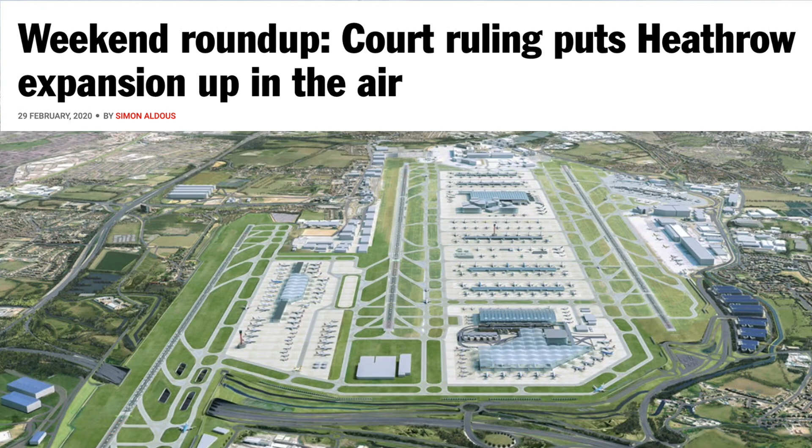I wanted to just set the scene a bit for resourceful material. We're in the world now where these sorts of planning applications can get refused. And also I just think the rhetoric for Futurebuild this year is exactly where we need to be. And I might draw your attention to one of the action groups that's been set up by architects in response to the climate and ecological emergency. So we got ACAN, who have got a stand over there, and you can go and take part in their carbon confessions.

We find ourselves in an environment where 75% of the population of the UK live in regions that have declared a climate and ecological emergency. Not only that, the local authority councils have said they want to be net carbon zero by 2030, which is of course pretty much impossible, but the ambition's to be applauded.

So why us in the construction industry? It's because we consume so much. 60% of the UK's waste is created by the construction industry. That's 120 million tonnes of waste a year. We consume 600 million tonnes of products annually.

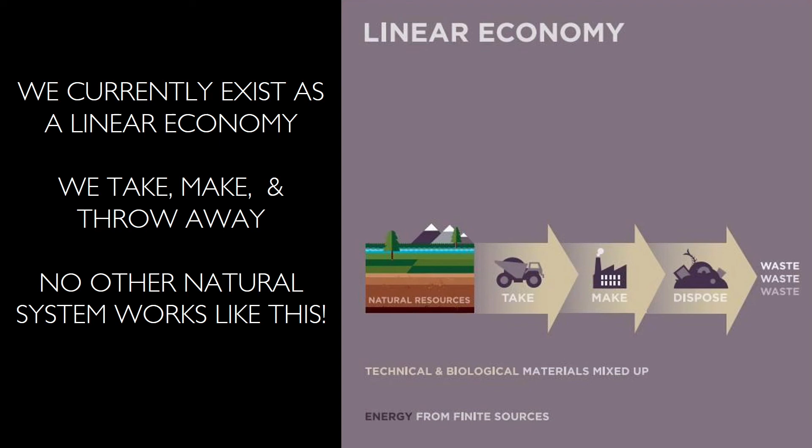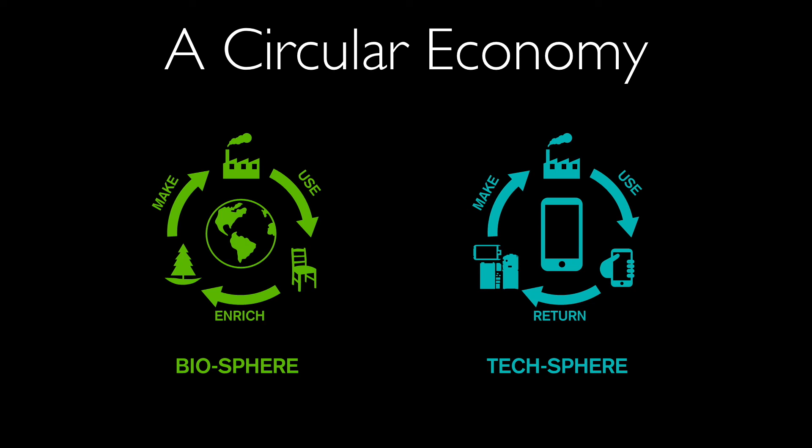But we have opportunities, and I think the circular economy and closed-loop systems and sustainability on the whole provides us with that. I wrote a book about it, which has got 30 case studies of projects dealing with recycling, reuse, reduce, and the holy grail of proper closed-loop systems. The construction industry's halved the amount of waste over the last 10 years that it sends to landfill and incineration, and WRAP estimates that nearly 20% of the construction industry is already circular.

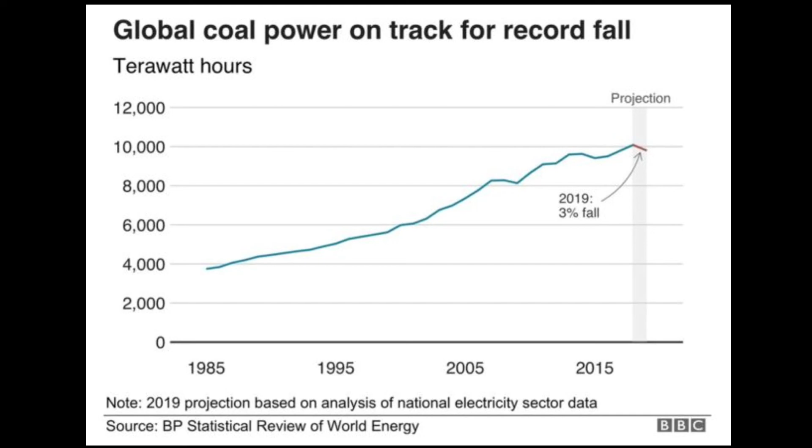And this is perhaps the best slide so far. We are reducing the amount of coal we're burning. And it's our cities that give us hope, I think, because I believe it will be these city-states that set the standard. They are at the moment with their net zero targets of 2030. That's within the context of building regulations that are nowhere near asking for any of that, and that's why there's been a big debate about Part L at the moment.

If you want to go on the ASBP website, you can see some resources that we've produced on natural fibres, information sheets, presentations, etc., and that's a growing body of work. So if you go on the ASBP website, you'll be able to learn a bit more.

So if we look at the natural fibre itself, you can see that it does many things. It's a heat buffer. It's an efficient insulator. It acts as a carbon store. It's a pollutant filter. It's a sound absorber. And that helps make it ideal for insulation. Because, of course, when we think of insulation, we just think of heat loss. But, of course, insulation does much more than that.

Insulation can amount to at least 50% of the volume of the building fabric. It has benefits in terms of every aspect that I've highlighted there, really. So when we think of insulation, we've got to see it as a multifunctional component of the building fabric. And I'm just going to run through the aspects of insulation and what makes natural fibres particularly good when it comes to each aspect of that.

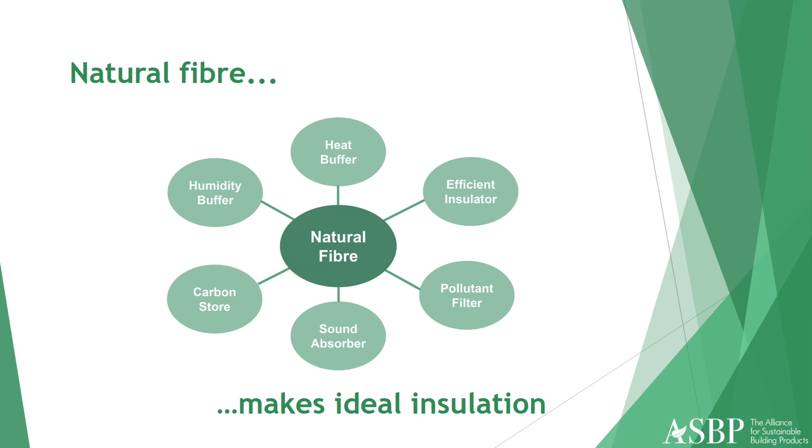So I've put at the top there a heat buffer. So if we then look at a heat buffer, what do we mean? Well, what we're trying to do is to make sure that the peak heat outside a building and the peak heat inside the building are shifted out of phase with each other, because the last thing we want is the inside of the building to be as hot as the outside of the building in the middle of the day. And in order to do that, we have to shift those peaks out of phase with each other.

And the best way to do that is to use a material that's got relatively high thermal mass, relatively high specific heat capacity, and low thermal conductivity, all of which you're going to get from a natural fibre. So what that means in practice is that as we have a high external temperature, the insulation itself is absorbing heat and it's pushing the peak temperature away.

In fact, what we're trying to do in a 24-hour cycle is move the peak external heat and the peak internal heat as far away from each other as possible, which is a 12-hour shift in the phase. And we can achieve that with a natural fibre insulation. You can see with a mineral-based product, you're only shifting that phase by about 6 hours, so it's not enough, really.

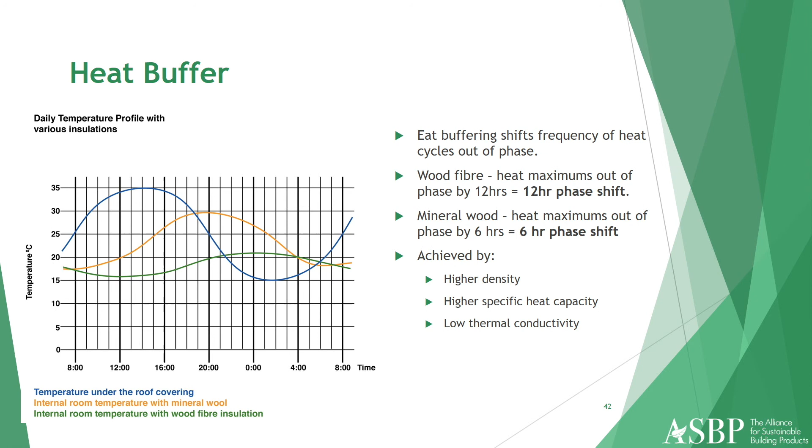We then look at natural fibres as a moisture buffer. It's all right. There's a lot of materials would describe themselves as breathable, and I suppose I can understand why, because it's a very intuitively positive thing to be breathable.

But natural fibre insulation is breathable in a true sense, in that the fibres themselves aren't just vapour open, but they absorb and release moisture and hold that moisture in a physically bound form that makes the moisture much less active and much less prone to doing damage. And then they can release the moisture again.

So moisture is held by natural fibre in three ways. One, very tightly, which is sort of permanently in the fibre. And then some water is held very loosely, and it's sort of absorbed a little bit and released a little bit. But you've got this sort of Goldilocks zone in the middle where the water can be easily absorbed, held safely and easily released, and that's where the real breathable benefit of a natural fibre comes in.

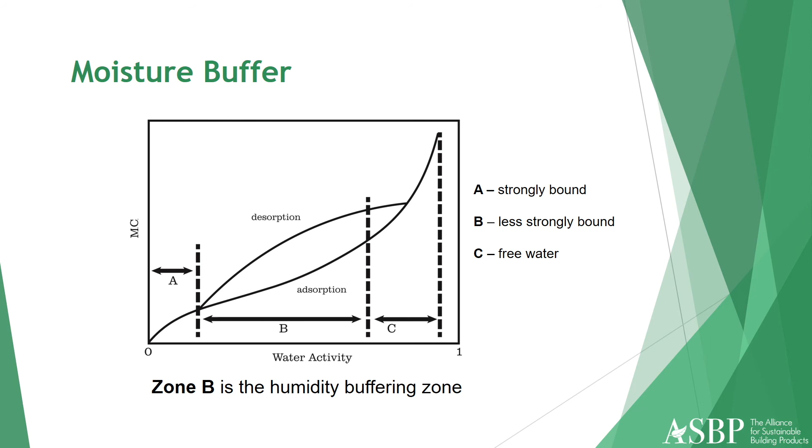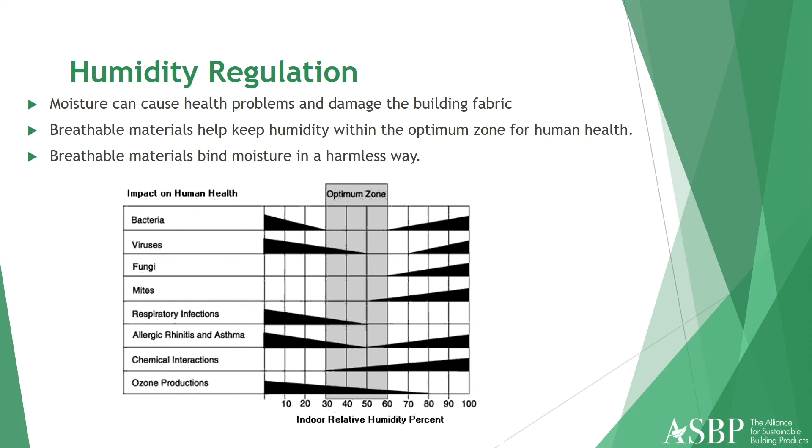The main benefit of breathability is to help maintain humidity within a safe level within the building, and I'm sure many people are familiar with this diagram, but it's very important to keep relative humidity within that optimal zone, because it inhibits a lot of negative impacts from bacteria, microbes, degradation within the building fabric, etc.

What happens is the natural fibers themselves will constantly adjust their moisture content to be in balance with the surrounding humidity, and adjust surrounding humidity to be in balance with theirs. And that's really important when it comes to insulation, because heat and humidity are very closely linked. As I mentioned earlier, the water molecules bind to the proteins or the carbohydrates in the natural fibers like magnets, and it holds the water in a very safe form.

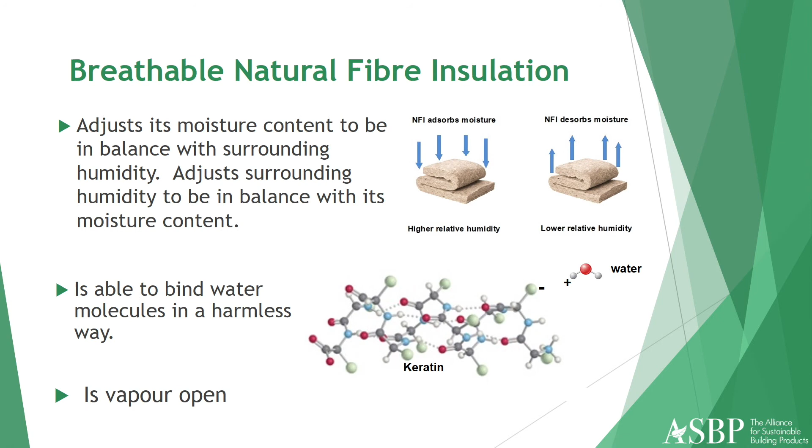Source control in emissions, VOC emissions from building materials, is becoming an increasingly important issue, and rightly so. I've got some examples here of thermally bonded sheep's wool, thermally bonded flexible wood fibre, and wood fibre boards, looking at total VOCs, carcinogenic, mutagenic and reprotoxic substances, and formaldehyde as well. And you can see for all three of those products, the levels of emissions are extremely low.

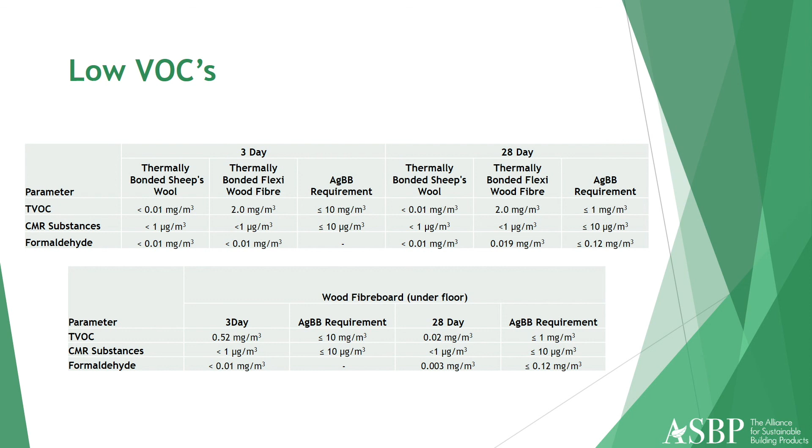If you look at sheep's wool in particular, sheep's wool can actually chemically neutralize formaldehyde. Formaldehyde is a problem I think a lot of people felt was dealt with in the 90s or the early noughties, but indoor formaldehyde levels are still a big issue. Formaldehyde off-gases from an awful lot of products within the built environment. So having a material that can permanently lock up and remove formaldehyde is a very useful property for anything.

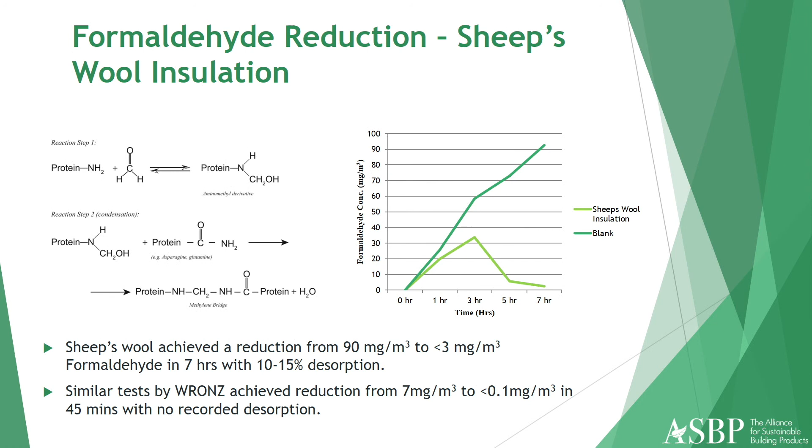I've sort of steered away from some of the eco stuff here, because I wanted to make the point that these are very functional products, that the natural fibers themselves provide the insulation with properties that are over and above some of the better known, more conventional products. And if we're going to shift to an economy or an environment where we're making use of more natural resources, we can't be pigeonholing these as merely an eco alternative. They're not just an eco alternative, they're functionally superior in many end uses.

I'm not saying in all end uses, because we have to realize that certain materials are appropriate for certain end uses, but certainly in terms of the use in construction, natural fibers, possibly other than structural timber, are currently underutilized. But as I said at the start, these products are being made at scale and are scalable, so there's no reason why we shouldn't, over the next decade, have a significant shift to the use of more natural fibers in end uses such as insulation.

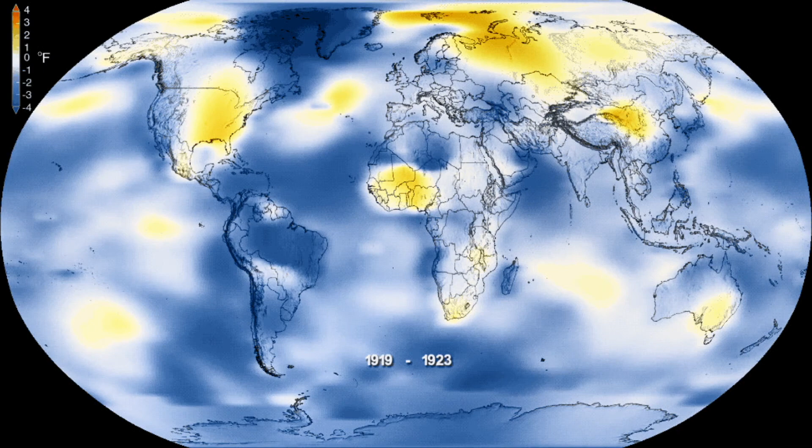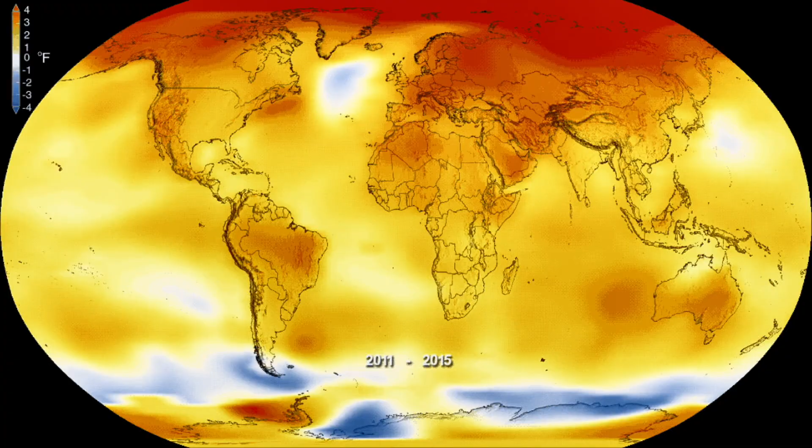And according to NASA, last year was the hottest year on record, with the Earth's surface temperatures rising by 1.1 degrees. And we're on a trajectory to raise this number to 5 degrees by the end of the century. The planet's long-term warming trend has caused wildfires to rage through the planet and freak storms to destroy and displace our communities. We share the Earth with around 15 million extraordinary species of animals, plants, and microorganisms.

And all this magnificent biodiversity is being lost due to land use, unsustainable use of natural resources, climate crisis, and pollution. And today, about 23% of mammals and 12% of birds are considered threatened, of which many are becoming extinct. Humanity is facing a mammoth but self-inflicted problem. And at Biome, we share the belief that there is a solution, and it has a name: biomimetics.

Biomimetics is design inspired by the way functional challenges have been solved in biology. And one of the fine examples of applied biomimetics is the Gherkin building. Its structure was configured by the very intricate but robust form of the Venus flower basket sponge. Nature has faced and resolved many challenges through centuries of evolution and has answers to engineering, design, and systemic problems.

If we look closer, we will find that in nature, the concept of waste is non-existent. All nutrients are in constant circulation, all forms are highly functional, and all organisms work with one another in symbiotic partnerships. And the principles of biomimetics have laid the foundation of what's now known as circular economy. So at the moment, we work in a very linear way. We extract, we make, we use, and we dispose.

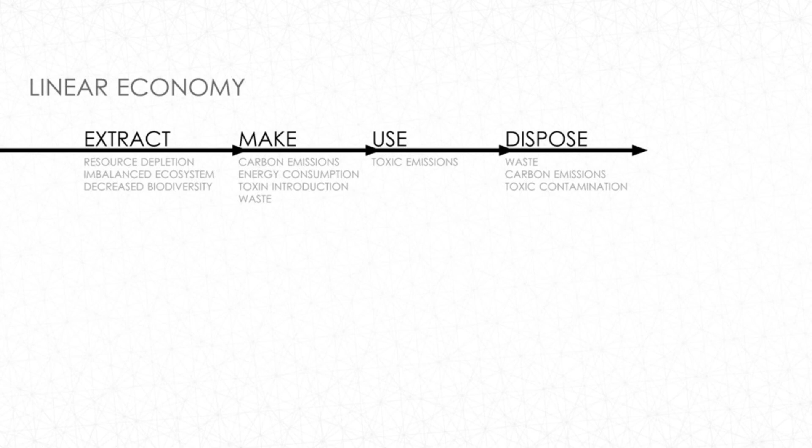However, when we shift towards the circular economy, this line will start to curve and move in infinite circles, allowing us to design out waste and keep our biological and technological nutrients in constant circulation, which will help us to have a regenerative impact on our environment, society, and economy at long last. And the principles of circular economy are at the very core of what we do at Biohm.

Biohm is a research and development-led company that allows nature to lead innovation to create a much more healthy and sustainable built environment. And we offer a collection of bio-based materials, construction systems, as well as research services to the industry. And one of the first materials I'd like you to meet today is ORB, or Organic Refuse Biocompound.

Now, at the core of ORB, or in fact all of our materials, are local waste streams. We transform food and agricultural waste into precious substrates that we then combine with our unique organic binder that, by the way, is made of edible ingredients that are available in abundance all over the world. And this compound can then be turned into highly functional construction materials with a variety of visual and mechanical qualities. ORB can be used for dry cladding, in interior architecture, as well as product and furniture design.

It's shutting down. It's shutting down. Bloody hell. Yeah, just carry on talking. I'll sort this out. I might as well keep talking.

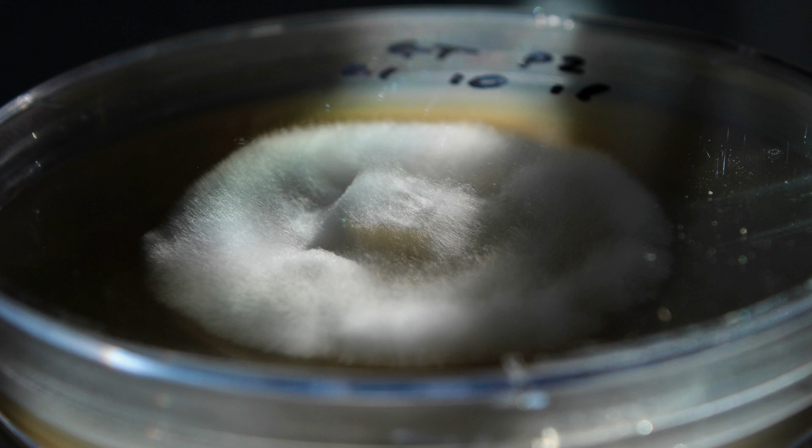Now, all of our materials will eventually combine to form our revolutionary construction system, Triagami. Triagami consists of building blocks that do not require any permanent fasteners or binders, which means that your home can shrink and grow in accordance with your needs, which will help us eventually transition towards agile communities and cities. We have been awarded for our work and recognized by many institutions.

And we are working closely with the world's largest corporations, the world's top universities, and the world's most prominent governments, and of course, with local communities, local waste streams, local businesses, globally, in an attempt to deliver on a dream of a biomimetic future, a future where industries are regenerative and work in symbiotic partnerships, where lands are nourished, where the waste is non-existent, where all nutrients are in constant circulation, where communities are prosperous, and where nature is flourishing.

Thank you. Thank you very much, Oksana. Sincere apologies for technicalities, but nonetheless a fantastically delivered presentation, so thank you. There'll no doubt be lots of questions for you at the end. As an exemplar, I mean, you say designer, but designer, materialist, scientist, all kind of rolled into one. All right, so thank you.

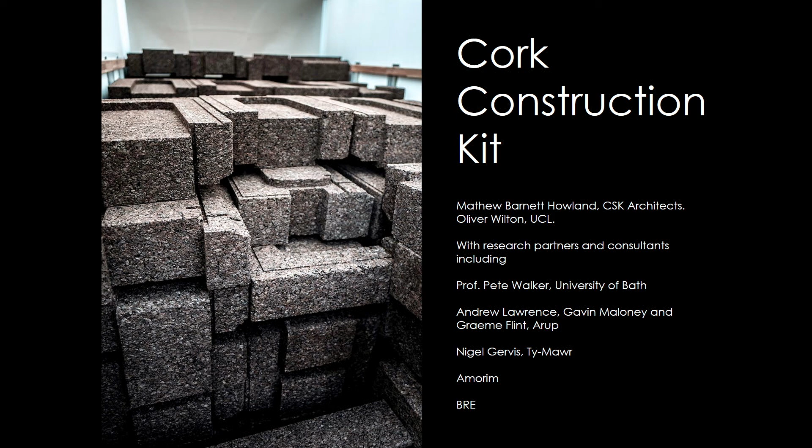Okay. So I'm going to talk about some work that I've been doing with cork over the past few years with people including Mathew Barnett Howland from CSK and research partners Professor Pete Walker from University of Bath, Andrew Lawrence, Gavin Maloney, Graeme Flint at Arup, and Nigel Gervis at Ty-Mawr. Amorim supplied the cork, BRE did a lot of the lab testing. Just see if I can move this up. Okay, it's going to be quite a rapid tour of what we've been doing over the last 5 years, really.

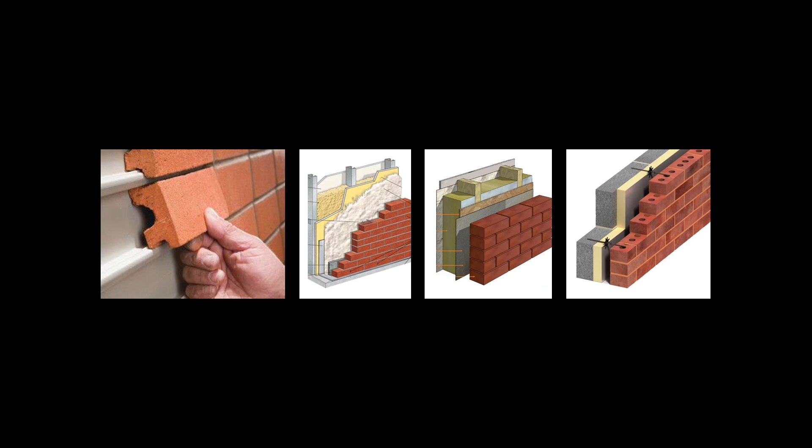So a lot of contemporary buildings deliver the sort of performance we're looking for via quite complex means. So you'll have elements that relate to structure, to thermal insulation, fire performance, internal and external finishes, that sort of thing. For example, brick buildings these days very often have got an external brick leaf. They might have a concrete block structure or a timber frame or steel structure, might have petrochemical insulation, lots of other things. And that introduces complexity over each stage of the building's life cycle. And it often ends in this, which is destructive demolition. They're too expensive to disassemble.

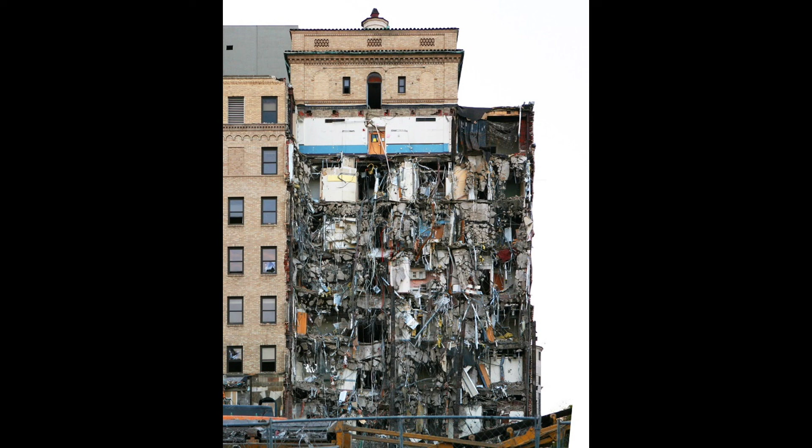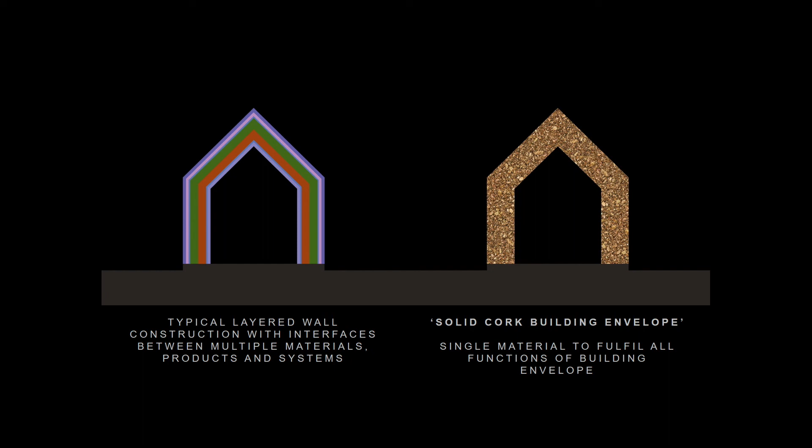So for this work, our aim was to deliver a different kind of construction system that gave us the current performance we're looking for from buildings, but did it in a much simpler way. On the right, this is our hypothesis that we could take cork and make a solid building envelope out of it that did all of these different things. And that's what I'm going to talk about now briefly.

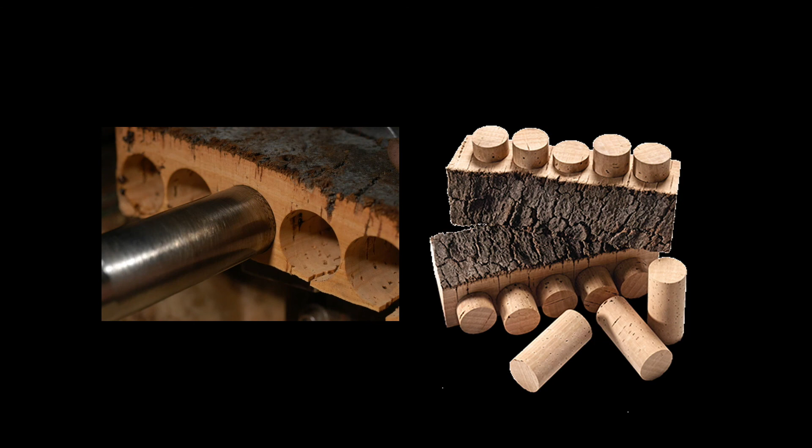So let's start off with the resource. Cork oaks have been growing around the Mediterranean basin for millennia. Cork is the bark of the cork oak, harvested about every 9 years, still using traditional methods. It's the outer bark of the tree, it's stripped without harming the tree and without causing significant disruption to the forest. These forests support significant biodiversity in the region. The prime cork is still mostly used for posh wine stoppers. You can see them extracted there on the left. And that leaves a lot of byproduct from that industry and from others.

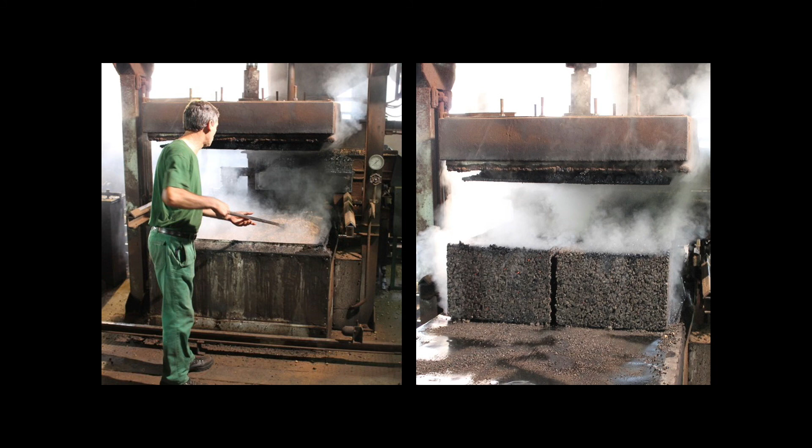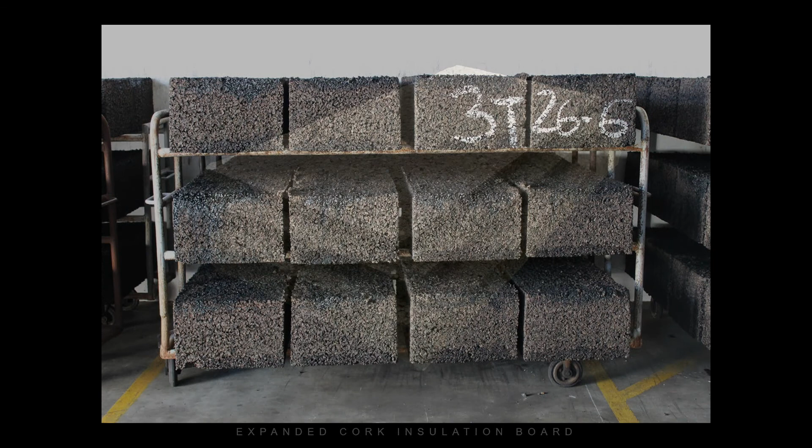The type of cork that we used for this work is expanded cork, and that's made using byproduct from other cork industries and also waste from cork oak forestry. Low-grade cork, ground up, put into an autoclave, here at Amorim in Lisbon on the left, cooked at over 300 degrees, and you get a nice freshly cooked cork billet coming out of there on the right. So it's 100% plant-based, it doesn't have any other chemical additives. These billets need to sit around and stabilize for a bit before they're typically chopped up into insulation board, which is the main use.

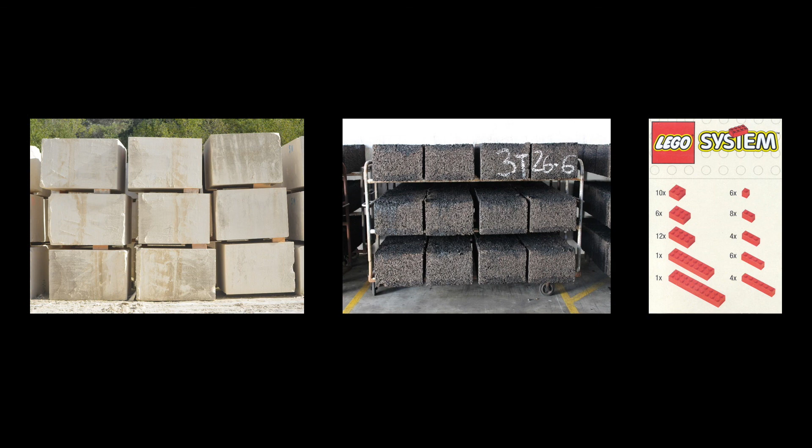Okay. So I outlined the team we worked with earlier, a mixture of academic and industry partners from across the supply chain, and we secured research funding from EPSRC and Innovate UK to proceed with this work, which ran from 2015 to 2018. So we started to think about cork as a bit like a sort of plant-based thermal insulative stone, and the aim was to develop a system that would enable us to simply assemble it, a bit like a giant toy construction kit, a bit like plant-based Lego.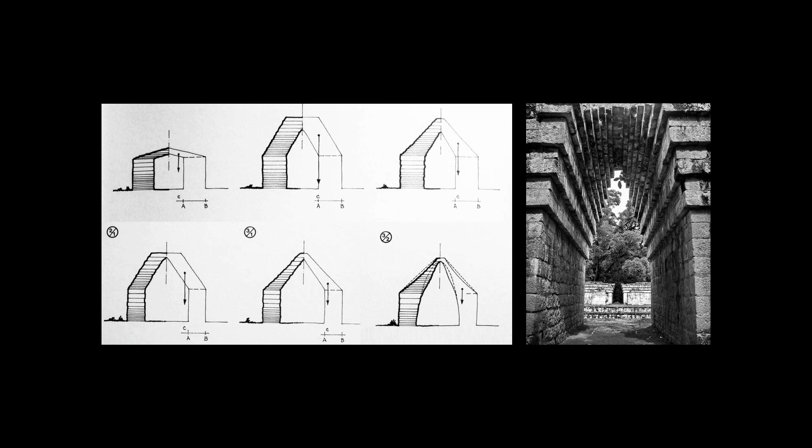So as well as this being an idea for the wall system, we wanted to extend that to a roof system. So rather than using a different form of roof construction, the roof system we developed is a corbelled system, which is basically a wall, but you just offset each block a bit, and then you end up with a roof as well. Yeah? So you'll see this, there are examples of this all over the world, dating back thousands of years, in dry stone construction.

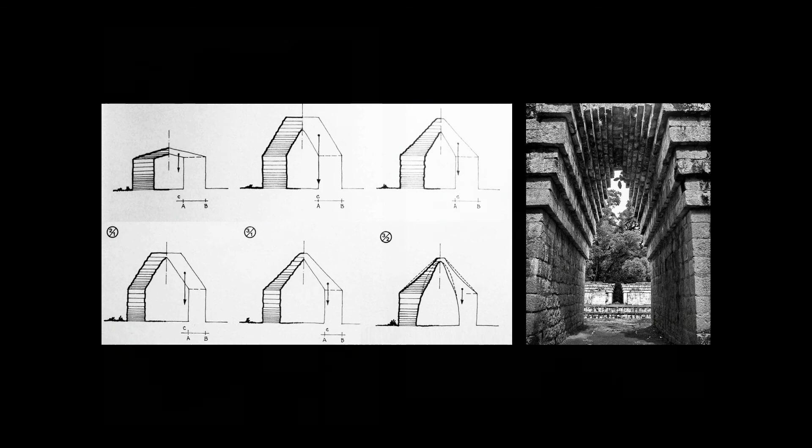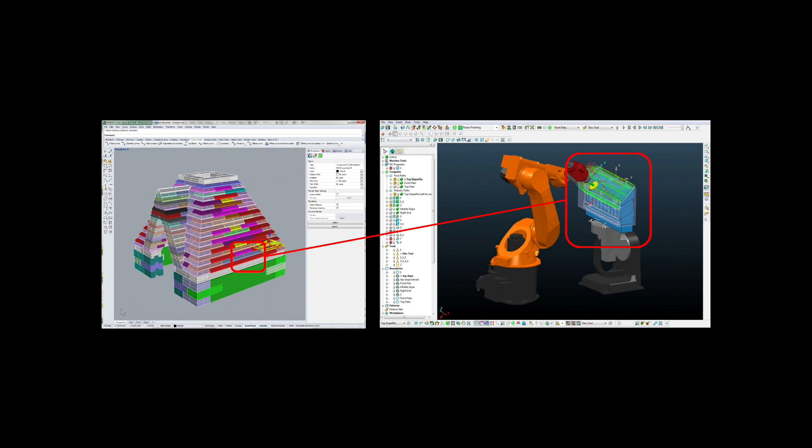So we got going at the Bartlett workshops, and things started to look reasonably promising, but you can see simple tongue and groove geometries to give a nice interlock. It's taken quite a lot of time to make these blocks, and the tolerance was quite challenging. So fortunately, we have colleagues at the Bartlett and kit at the Bartlett that enabled us to switch across to robotic milling, and we developed a tailored robotic milling method to construct these blocks more quickly. Let's see if this will work.

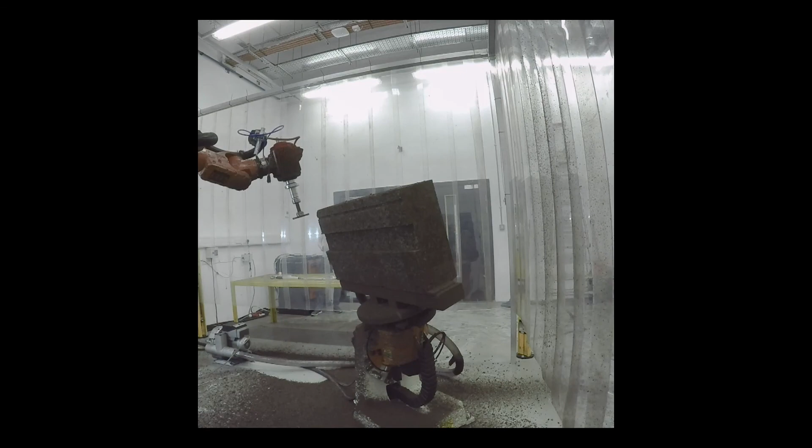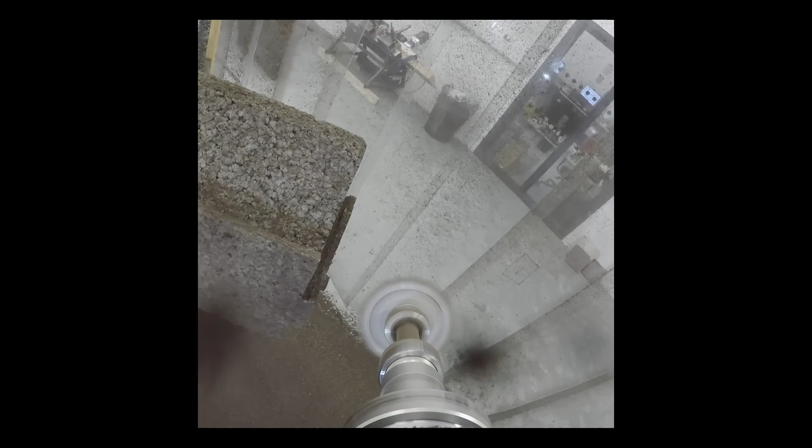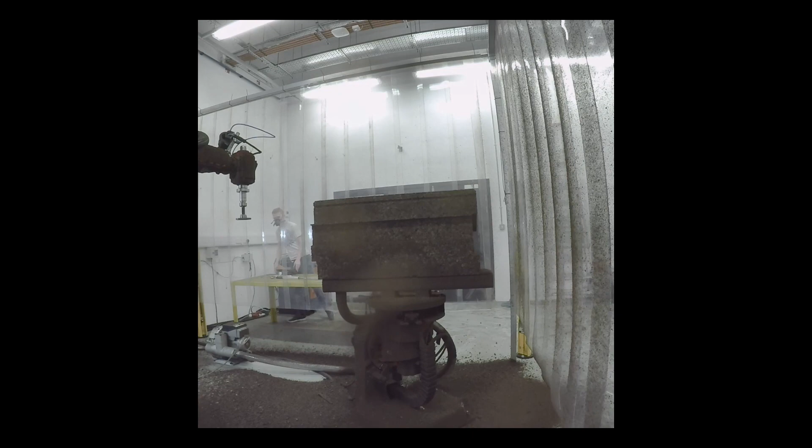So this is a sped up slide of the robot cutting a roof block. There's a lot of hard work developing the method, but when it did work, which it did in the end, it took about 15 minutes to cut a block. Okay, so you can see there's no tool changing; it's all done in a single process. One big tool to do high volume removal, and using the edge just to put in the little details. Yeah? So there's the first wall.

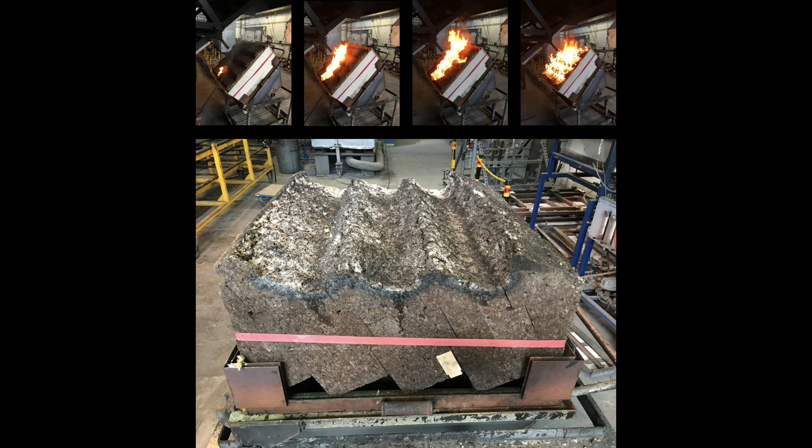And the roof system didn't; it leaked. So we added timber weatherboarding on the inclined faces. Yeah, it was trickling through in the end, basically. And after that it also passed with flying colours. Pete Walker at Bath did a lot of structural testing. I won't be detailing that now, but that was a critical part of the work.

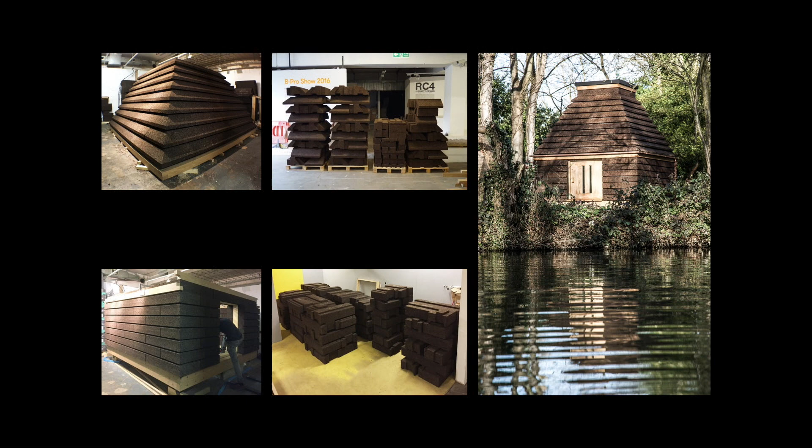We did quite a bit of fire testing at BRE too. Cork's flammable. It's a little bit like CLT, slightly more flammable. So you get a spread of flame, and it eventually self-extinguishes. So this gave us the data, the characterization that Arup needed to engineer the projects that we went on to do. We also built a test building, cork cabin, assembled in the Bartlett on the left, disassembled, transported to site and reassembled. So that also gave us the chance to test and demonstrate the design for disassembly concept.

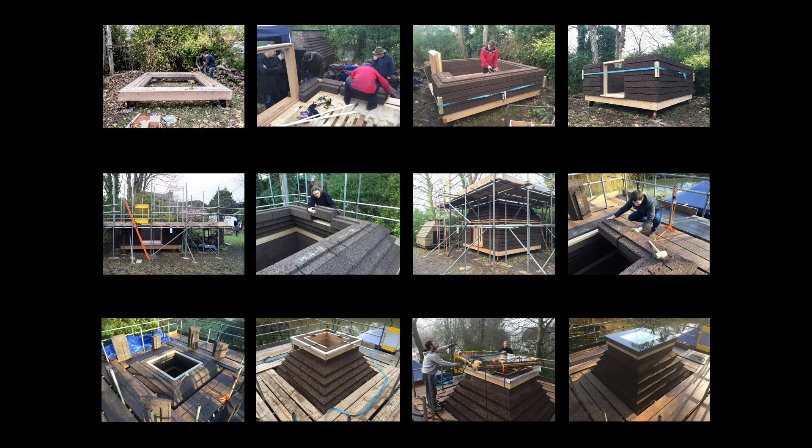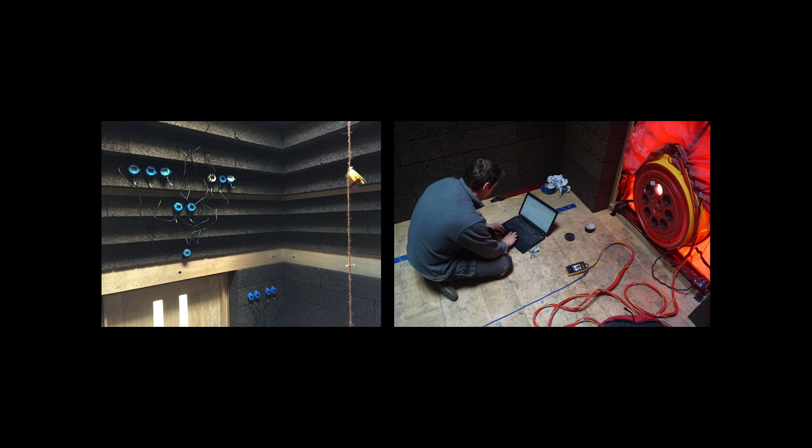It was very easy to disassemble and then put back together again. There's us putting it together on site. Each block weighs about 12 kilograms, so it's fairly easy to assemble. Here's the cork cabin and a smaller test building too. On site, we did a range of testing, thermal and humidity testing, to find out what was actually happening in the depth of the wall. We did standard building regs air pressure testing, and we were pleased that it passed the test.

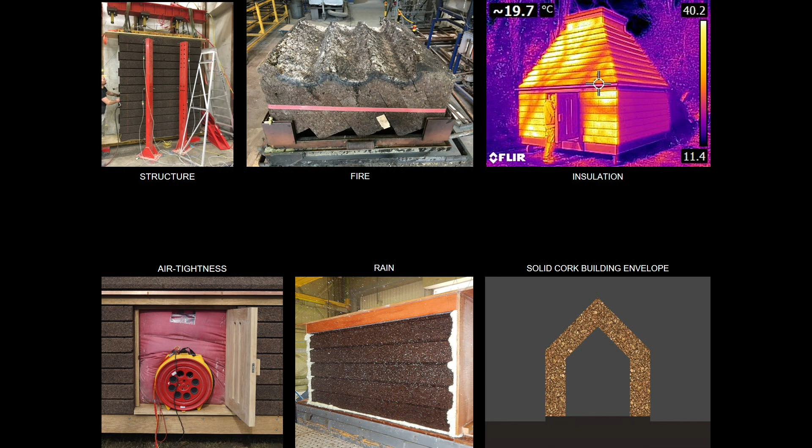And so after this time, we'd got a system that kind of worked, that we were then ready to apply to a live project. So Cork House. So fortunately, I was working with Matthew Barnett Howland and Dido Milne on this. They funded the project. Matthew also built it, so we're very fortunate to have people to work with that let us get straight on with a proper building after this. Yeah. So here's a cork construction kit, which we used for the house. It's all dry assembly. There's no cement or mortar. There's no on-site gluing together of components.

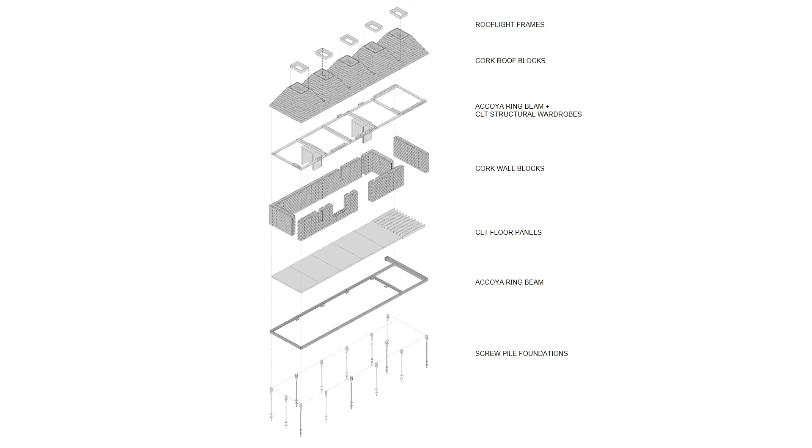It's all dry connected. Screw piles, timber deck, cork wall blocks, timber ring beam, cork roof, roof lights on top that help to stop it blowing away. It's not connected down at all, it's just dry assembled. This is the house. It sits on a small island on the Thames between two existing gardens, acts as a kind of gateway. Five pyramids, each with particular programmatic functions.

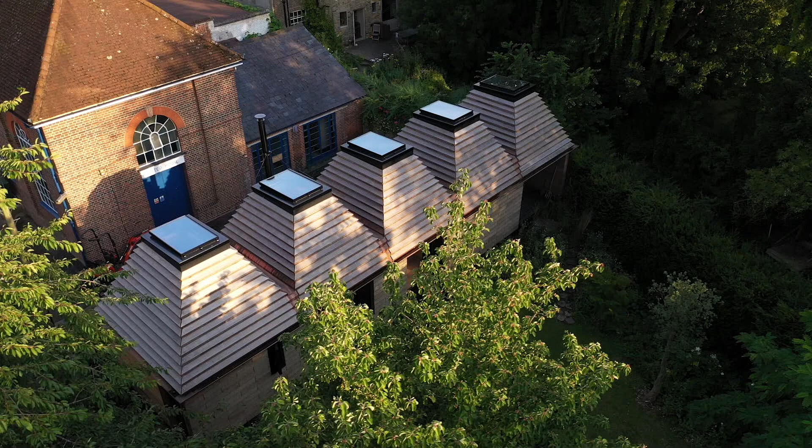This is what it looked like when it was assembled. So you can see it's nestling in there. There's a Thames pumping station sitting behind it. You can see that the cork naturally silvers over time, as does the cedar. So it all sits quite comfortably together as a palette of materials. You can see the roof lights on top there that hold it down and let in plenty of daylight.

It's almost kind of temple-like internally. You can feel the load-bearing structure. It's also very pleasant internally. Smells good, calm acoustic, well daylit.

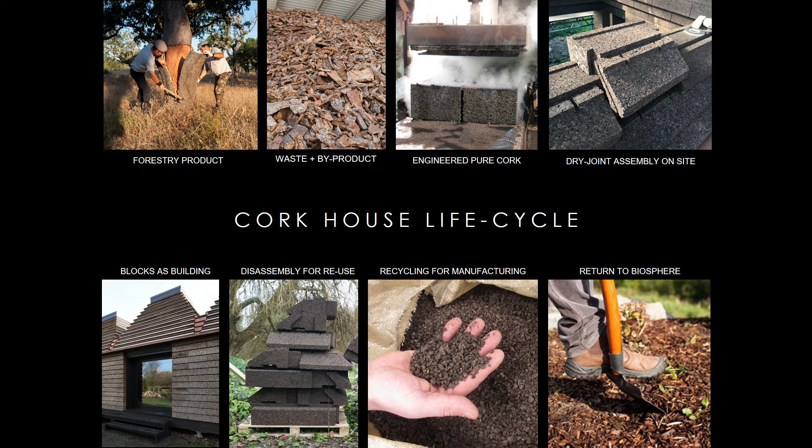So this is the life cycle. Forestry product, using waste and byproduct to make a pure plant-based block, dry assembled on site. At the end of life, easy to disassemble for reuse or recycle into manufacturing, or because it's pure plant-based, it can go straight back into the biosphere as well.

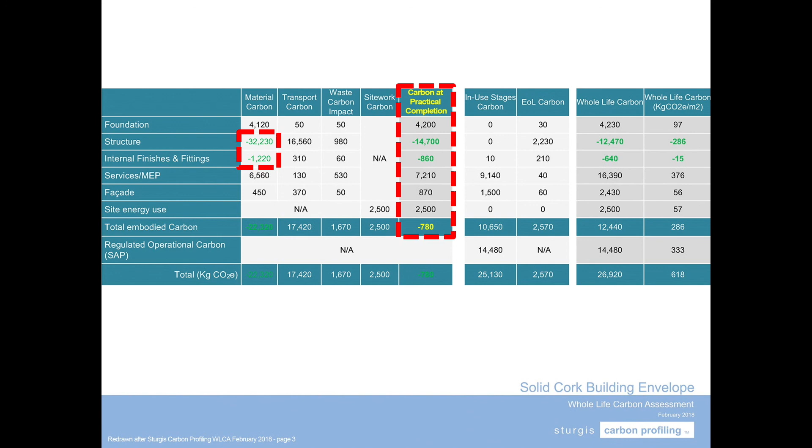Last couple of slides. So we got a whole life carbon assessment done. Sturgis carbon profiling indicated it was slightly carbon negative at completion because of the carbon locked into the plant-based materials. And then shipping that across from Portugal burnt about half of the carbon we'd locked in, but it still came out as carbon negative. And whole life assessment indicates very low embodied carbon over a 60-year life cycle, also low operational because it uses logs from tree maintenance on site to heat it. That's the main reason, yeah?

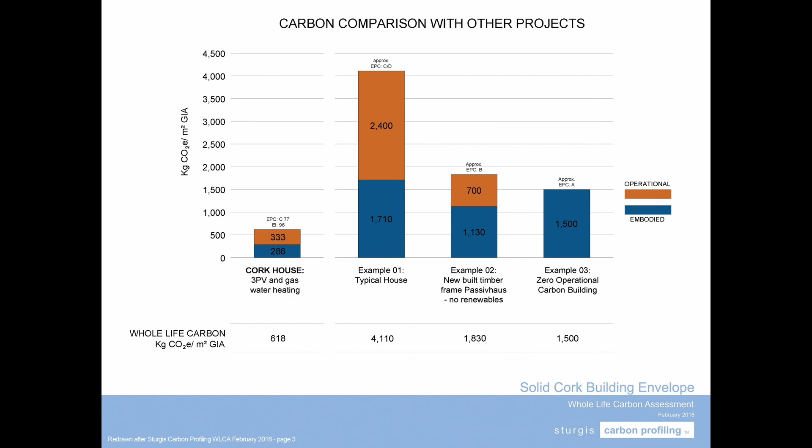And some comparisons to some other building types. So we're now moving forward with this general approach, form follows life cycle, to investigate and develop some other low carbon, simple forms of building. Thank you. Brilliant.

Thank you very much, Oliver. I mean, again, there'll be loads of questions. I guess what really strikes me, having worked in sustainability for quite some time, is there's a lot of implicit notions of how sustainable design relates back to nature. But actually, a lot of what we do is really just mitigating human behaviour. It isn't really engaging directly with the benefit of species and so on. But I think in each of these cases, your propositions really do. There really is a channel that connects back to improving natural systems, which I think is something to really, really celebrate. But what a fantastic technical project.

Thank you very much. Okay, so next is Alex. Alex is with us. Hi, Alex. Thank you. So Alex is from Hempcrete. We've done some projects around flax and so on in the past, so I'm very interested to hear more about your proposition. Alex, everybody's sticking to time, so we should have some questions. Thank you. Hi there. Can you hear me?

Yeah. I do like being fourth because it means that a lot of the people who come before me have covered a lot of the relevant science, and I can just get on and show you some pretty pictures. So my company, UK Hempcrete, we're known for hempcrete, which is not exactly a new material, or relatively, I suppose it's new. It's been around for about 30 years. We've been building with it in this country for 20 years, and my own practice has been over just over a decade. But we also work with a range of other natural materials that complement hempcrete.

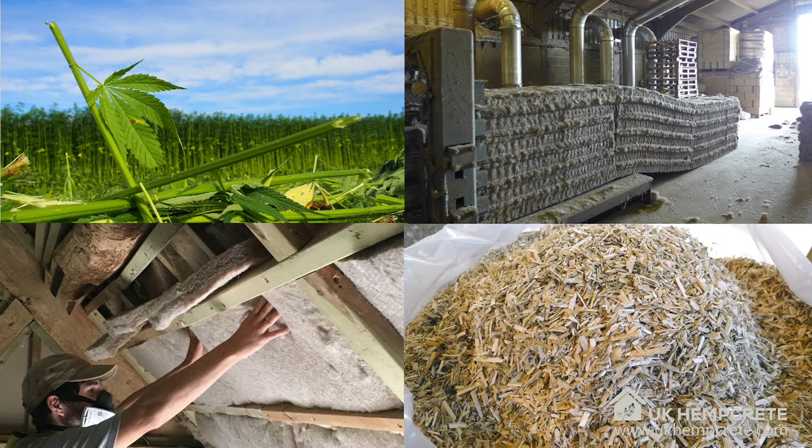So, sorry, what am I doing? And that would include other plant-based insulation materials and construction materials. So typically we're using a timber structural frame and then hempcrete, wood fibre insulation, cork insulation, a range of natural finishes, lime, clay, etc.

So just up on the left there, that's UK hemp growing in Yorkshire, and that's then harvested, processed to separate the bast fibre, which is used for textiles and a range of industrial applications. And that bast fibre is separated away from the stem, which is the woody part on the bottom right that you can see, which is what we use for an aggregate in hempcrete. The bottom left is hemp fibre insulation, actually made by Mark's company, being installed in a roof. So that's an application from the other part of the hemp stalk.

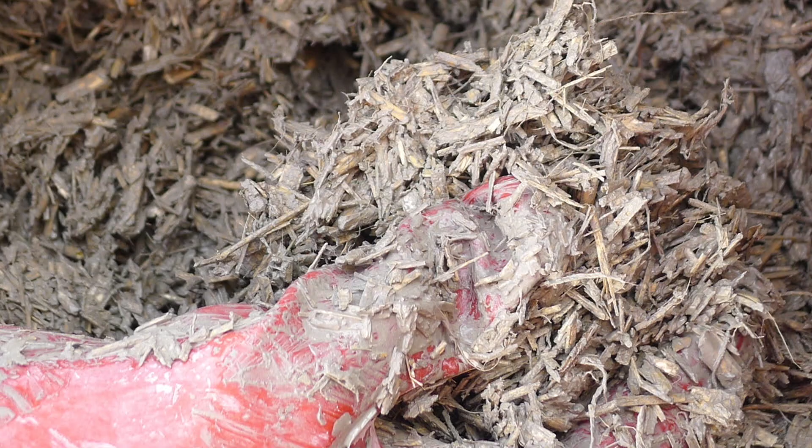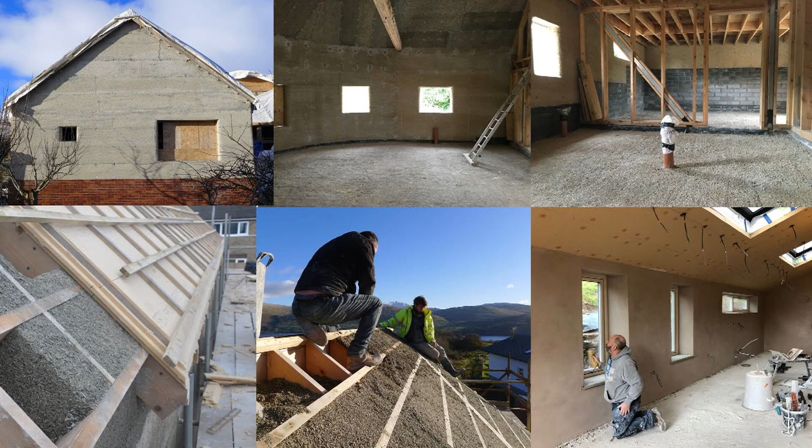So hempcrete itself is a mixture of the woody stalk of the hemp plant mixed with a lime binder. And you can think of it as a kind of loose fill material that then sets and holds its own shape. And it's used as a walling material, as a roof insulation, a floor insulation. It's used as an insulation to add to existing masonry walls as a solid wall insulation. It can be cast in shuttering or it can be spray applied. Basically it's a material that will go into any shape void and then set.

Okay, so this is just showing you a few of the different applications. You can see in the bottom left where we're combining it, that's the top of a hempcrete wall with tongue and groove wood fibre board insulation over the top of the rafters, giving you a nice airtight seal over the roof. And just at the top left of that bottom left photograph, you can see the space between the rafters, which is going to be filled with, in this case, sheep's wool insulation. Okay. As well as hempcrete.

Am I pressing the wrong... delay? Sorry.

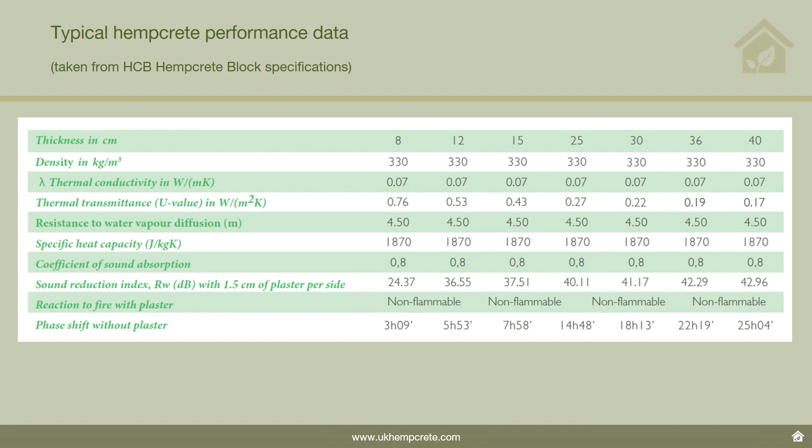So all of this, I think, it's just a delay, isn't it?

So all of this makes hempcrete quite a popular material. As I say, we've been building in this country for 20 years now. There are hempcrete housing estates dotted up and down and around the country. There are lots of hempcrete commercial buildings. My own company does a lot of domestic scale projects, some commercial subcontract. So we're working predominantly in the domestic sector, where you tend to get early adopters who know what they want and why they're spending the money to get a particular performance from particular materials.

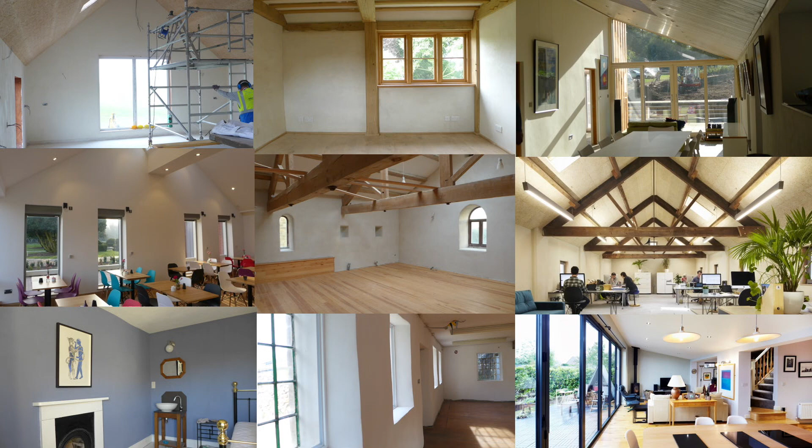This is the kind of internal finish that we're getting in our buildings. So this is typically with a lime plaster, clay plaster. As can be seen on the previous slide, the external finishes would typically be a lime render, but can also be timber clad or clad in masonry using a lime mortar. So the key thing is that the whole building envelope is vapor permeable, and as Mark said earlier, that helps to passively regulate the internal humidity in the building, as well as allowing moisture that we create inside the building to pass through the envelope and keep the building fabric in good condition.

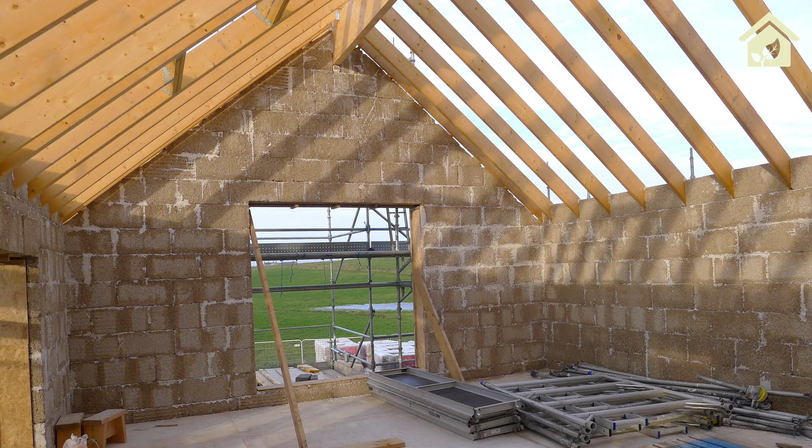We also use hempcrete in the retrofit and renovation of older and historic buildings. I'm not going to focus too much on that today. And I just wanted to take you through the sequence of us building up the fabric of a new build house. So in this case, we're using a combination of precast hempcrete blocks internally as an internal skin, and then we're wet casting hempcrete on the outside of that to give a continuous single piece of material around the outside of the building.

So the benefit of having the precast blocks internally is that the internal skin is already dry before it comes on site, and that means you can move ahead with fitting out the building while the outside skin is still drying. So we first build a timber structural frame.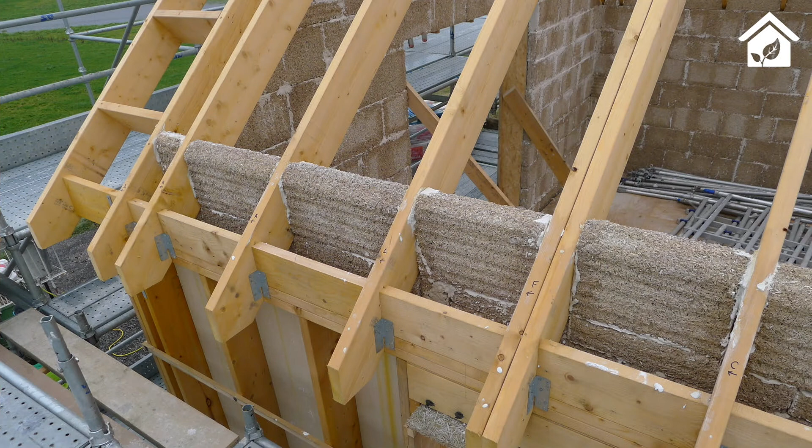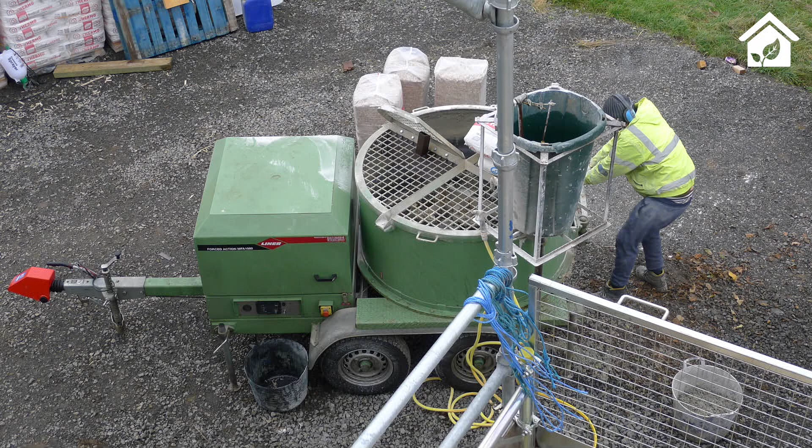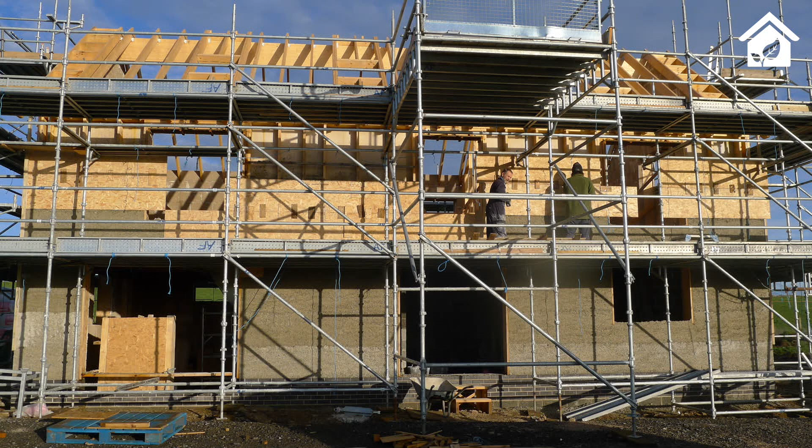We apply that skin of blocks internally, and you can see there that's the structure with the blocks applied, waiting for the external hempcrete, which is then mixed on site in a large pan mixer. It's really simple, shuttering up the outside of the building, filling that with the cast hempcrete, which gives you the benefit of this single external layer, avoiding any thermal bridging, meaning that you've got a single piece of material to

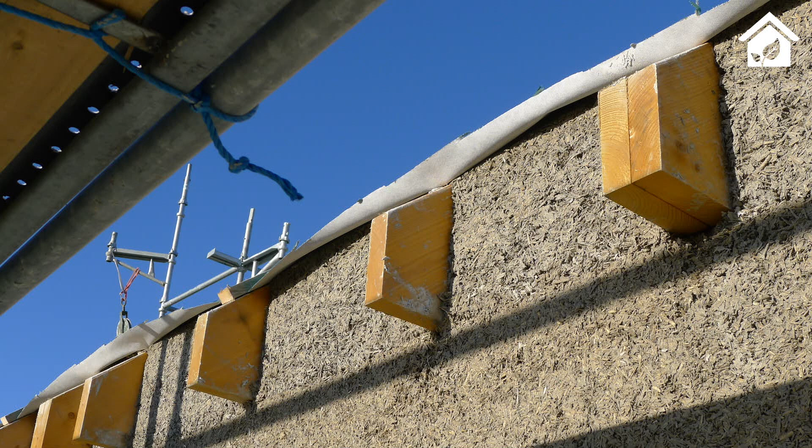plaster and make airtight. You can see there the two layers together in the envelope of the building, and this I think demonstrates the advantage of the cast material, that you get this single piece that fits very closely to the building's frame. We then finish the hempcrete installation, leave it covered for the other contractors on site who are doing the roof installation.

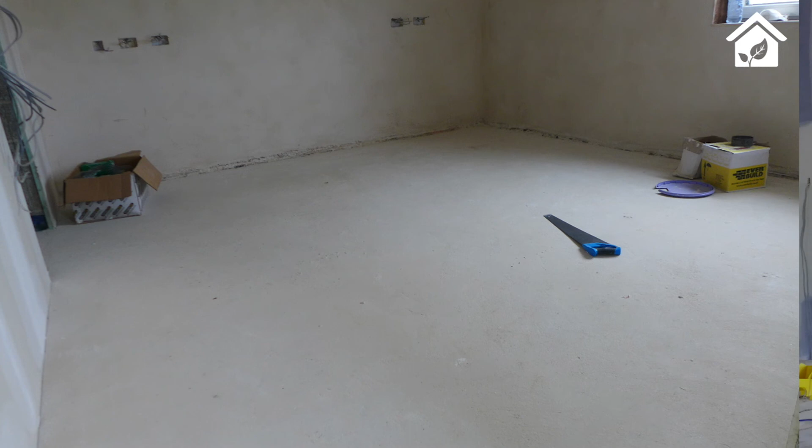Roof build-up was recycled wood fibre insulation. So the building gets roofed and windows go in while the external hempcrete's drying, and then we come back to install the lime floors and the internal lime plaster, and then eventually the lime render externally.

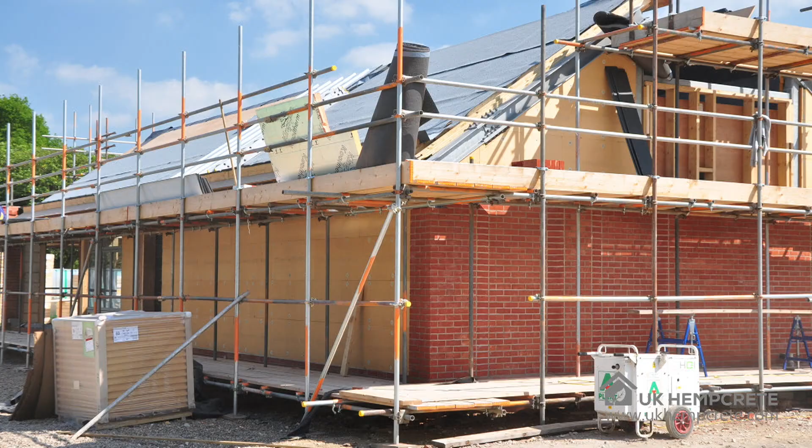Okay, got I think probably 30 seconds more, so just to show you the same concept in a commercial build. So this is timber cassettes inside a steel frame building, hempcrete blocks installed on site, and then the outside of those cassettes is wrapped in wood fibre insulation, taking in the steel frame and the timber frame, and some of the gables of the building are brick clad.

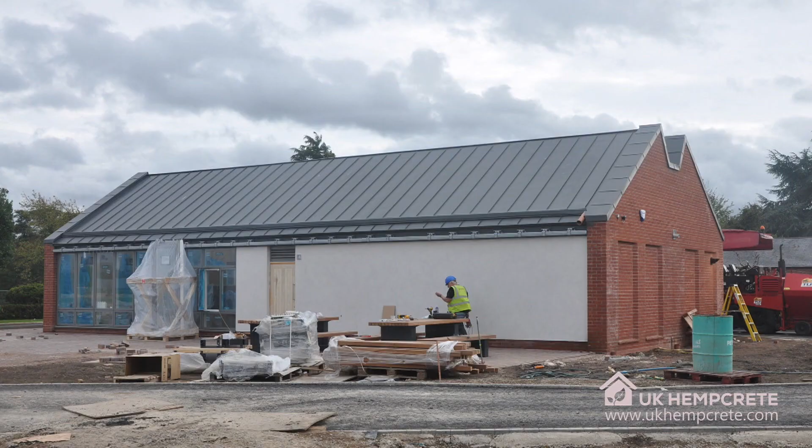And then on other elevations of the building, the lime render is applied directly onto the wood fibre. And the reason for doing that is it's just a little bit easier in a commercial scale project not to have the wet installation of hempcrete on site.

So finally, John is joining us. Thanks, John. John Thorogood is joining us from Graphenstone, UK. And one of the materials John is hopefully going to talk about is graphene, which is seen as one of these kind of revolutionary, transformative materials. So I'm really looking forward to hearing a bit more about that. Okay. So thank you, John. I'll give you a 2-minute warning.

Thank you. Good morning to you all, and thank you so much for your time today. Graphenstone is the brainchild of a chemical engineer who dedicated himself to the idea of developing natural, ecological, and health-conscious coatings for the 21st century. After much research and testing, Antonio Jimenez has succeeded in developing paints that harness graphene technology from the Nobel Prize-winning scientists of Manchester University to deliver mineral paints that are simply unmatched in health and durability.

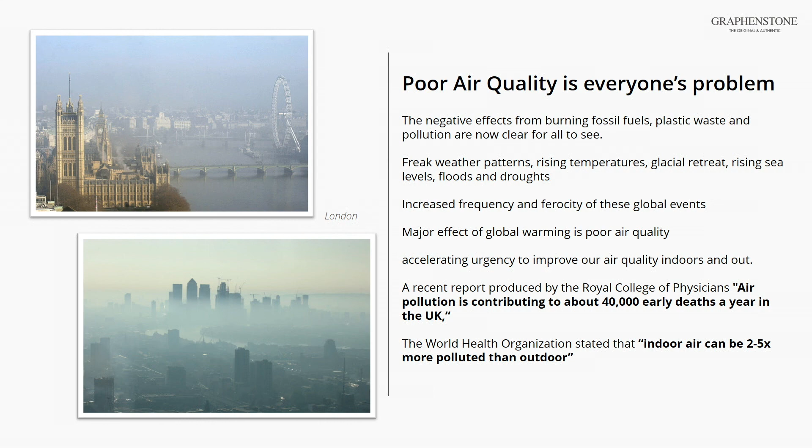Paint selection can play a major part in this, with most having high levels of formaldehydes, benzenes, CO2 and other volatile organic compounds known as VOCs. These VOCs are released into our air during the drying period and for many months thereafter, meaning that this toxicity remains in our spaces for a significant time with potentially disastrous consequences.

To put this into perspective, a World Health Organization study claimed that professional decorators are up to 40% more likely to contract lung cancer due to their constant exposure to these VOCs. When these VOCs react with oxygen, they produce bad ozone, which contributes significantly to the greenhouse effect.

Modern acrylic paints are also not particularly breathable. They can seal in moisture behind the paint film, and this moisture can lead to fungus, mould and bacteria, all of which are highly damaging to human health. The British Coatings Federation claims that 700 million litres of paint are sold each year in the UK, and the Environmental Protection Agency classifies paint as one of its top 5 most hazardous substances.

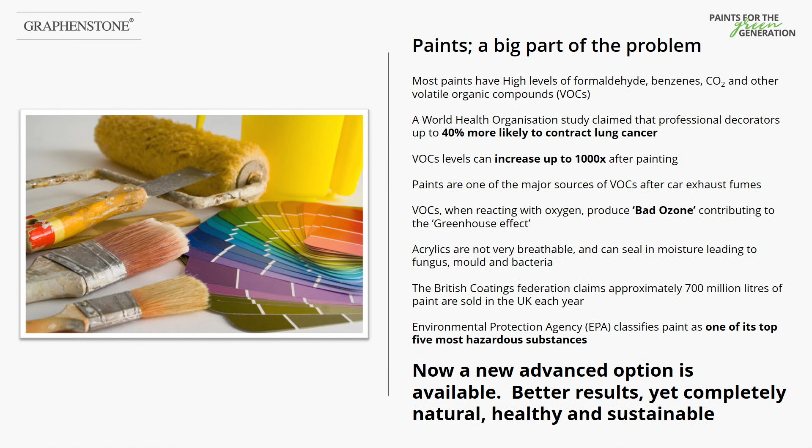But now, a new advanced option is available. Better results, yet completely natural and sustainable. This is because we add graphene to our products. Graphene is a remarkable material that was first discovered in 2004 at the University of Manchester and later won the Nobel Prize for Physics in 2010. The physical properties are quite remarkable, space age almost. 200 times stronger than tensile steel, 1,000 times more conductive than copper, and 20% flexibility without cracking.

At Graphenstone, we have weaved graphene throughout the molecular structure of our natural minerals to give these once brittle materials a structural support mesh, holding everything together. This means that our 100% natural, sustainable paints are now Class 1 strength for the first time, and quite uniquely elastic, meaning it will resist cracking and flex as buildings move. The structural support from graphene also means the paint feels like a normal paint to apply, something certainly not usual with lime paints of the past.

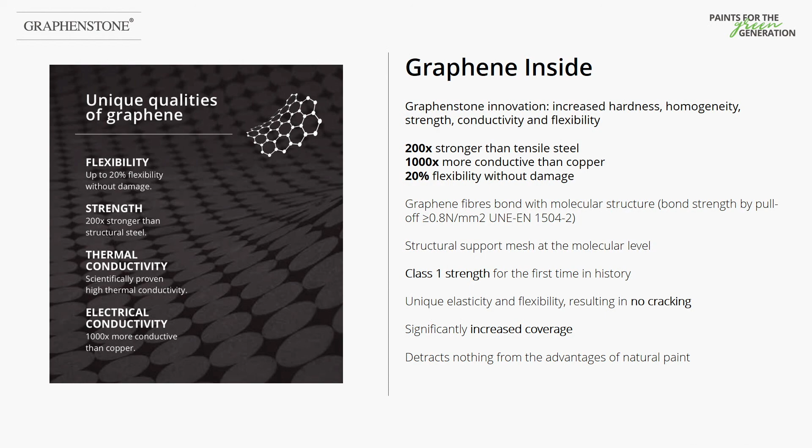All of the advantages of adding graphene, coupled with the advantages of the natural materials, means we finally have a product range that meets our needs without the toxicity. The raw material for our product range is pure limestone. It is 100% natural and sustainable. It has zero VOCs, acrylics, formaldehydes, benzenes or plastics of the more often used trade paints. Absolutely zero toxicity. The wonderful part of this material is it absorbs carbon dioxide at a rate of approximately 4.8 kilos per 15 litres of paint.

After painting, calcium hydroxide cures on the wall, and as it cures, it absorbs CO2 and becomes calcium carbonate. That chemical reaction essentially turns the paint back into limestone, and it absorbs CO2 on its journey to do this. Our paints, due to the lack of toxic ingredients, have no real smell. It is also a naturally high pH of 12.5, which means nothing likes to grow on it, taking care of any potential problems with algae, mold, fungus and bacteria.

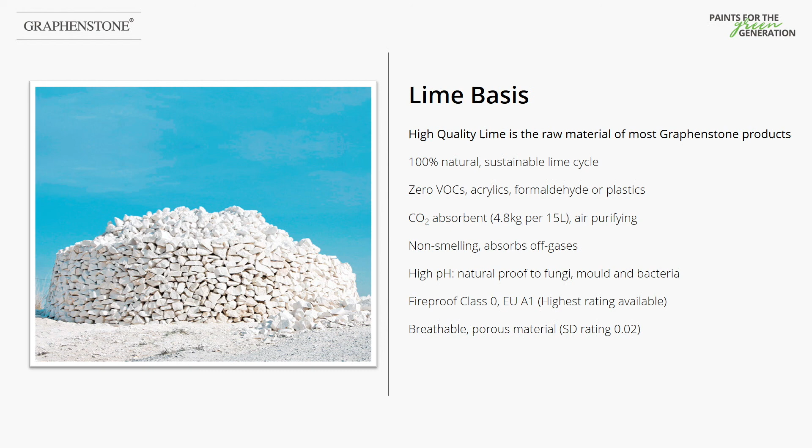The paint is naturally fire retardant to Class O, the highest standard available. And being a natural mineral, it is completely vapor permeable. It allows buildings to breathe and lets moisture pass freely through it. Great for heritage properties and great for new build construction. So this is the basis of our paint, free of the toxic and environmental disadvantages of the regular trade paints, but with numerous advantages naturally occurring in these materials. The addition of graphene takes nothing away from these advantages, but enhances the performance drastically by adding strength, durability, flexibility, and homogeneity.

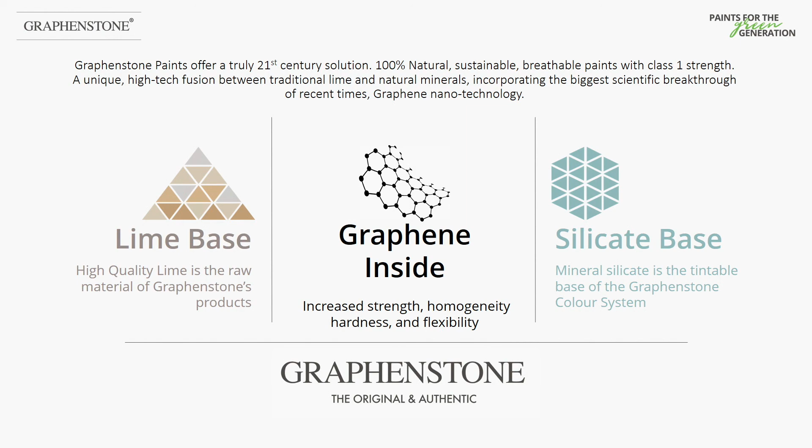This all results in the perfect mix: tradition, innovation, and technology, creating paints that meet the demands of modern life in a far more natural and sustainable way. Surely this is the ultimate goal for all of us. So to summarise, our paints offer exceptional opacity with up to 70% solid content. They are fully breathable with SD ratings from 0.02. They offer traditional, ultra-flat and modern washable finishes, all with Class 1 strength. They have zero toxins and are free of VOCs, APEOs and MIT preservatives.

Graphenstone's commitment to the environment dictates the use of natural, ecological materials. Our core values are ecology, nature, sustainability, and respect for the environment. Our factory in Spain is powered by 100% renewable energy, and we use non-polluting raw materials and recycled wastewater.